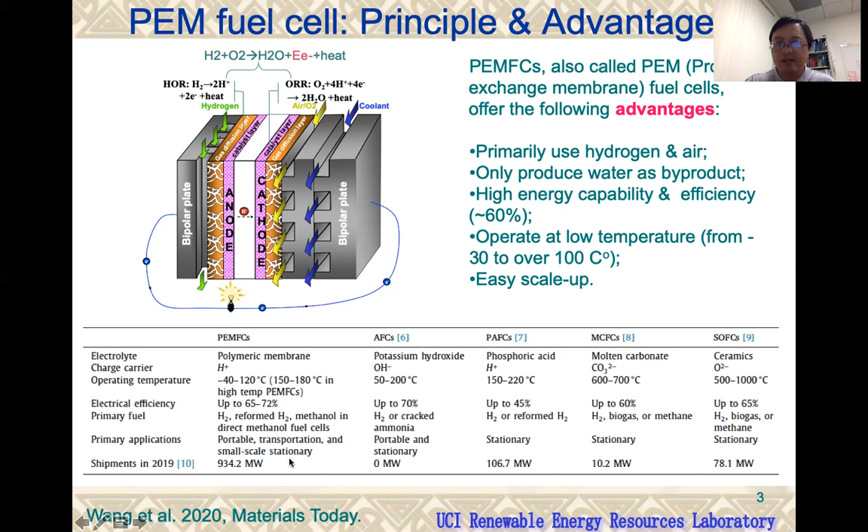In 2019, the data shows that PEM fuel cells are the major fuel cell type which receives the most R&D efforts.

Putting them together, we get a fuel cell stack. A number of fuel cells are put together, and this stack needs, for example, a boost converter and a hydrogen circulating pump to make a fuel cell engine. Then we put the engine in a car or bus to power the vehicle.

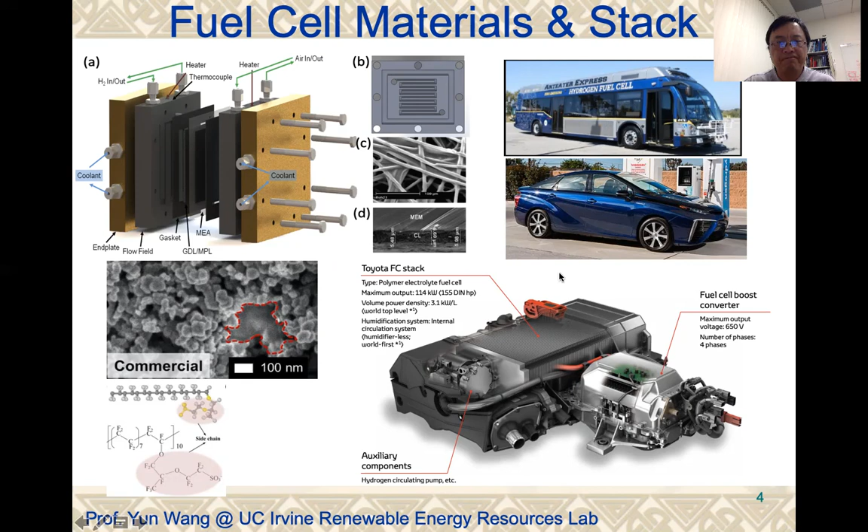In the past few years, you will see a number of fuel cell vehicles, for example, Toyota Mirai, Hyundai, and Honda, and also a few fuel cell buses operating on the road.

By 2019, there were 8,000, 5,000, and 3,000 fuel cell vehicles in the US, South Korea, and Japan respectively, and 2,000 in Europe. By 2030, there are goal targets of 5.3 million, and nearly a million for South Korea and Japan, 4.2 million in Europe, and 1 million in China. So again, this is a fast-growing market for fuel cell applications.

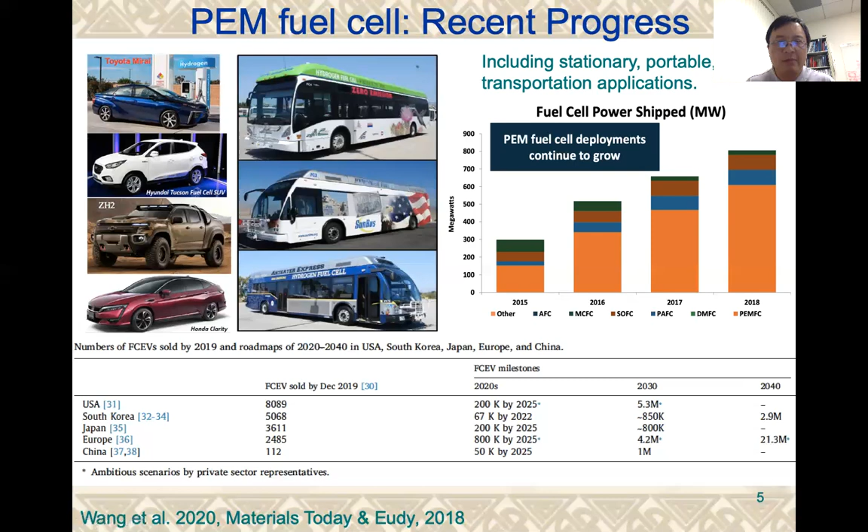On this side is the input to the vehicle: diesel plus air, and hydrogen plus air. The hydrogen fuel cell uses less than half as much air, and this is for one year of operation, comparable in terms of operation hours and distance.

For the output, you see carbon dioxide, carbon monoxide, NOx, and particulate matter for the diesel engine, while for hydrogen there is only water and some unused oxygen and nitrogen. So you see from the comparison the clean power and zero emission technology enabled by PEM fuel cell technology.

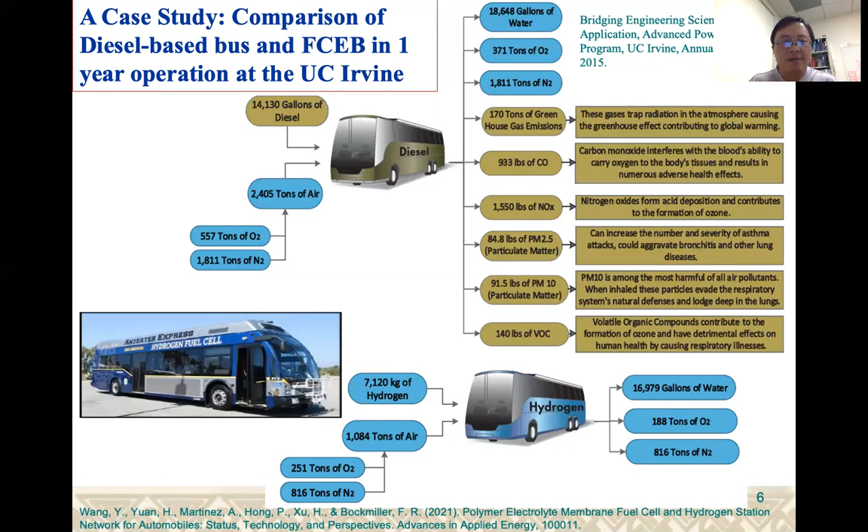Another barrier to fuel cell vehicle application is hydrogen refueling station availability. This shows a hydrogen gas station structure. Since this is gas refueling, it can take 3 to 5 minutes, comparable to traditional gasoline refueling, but much faster than a battery recharge station, which takes about 20 to 30 minutes.

In the United States, we have 44 stations, most of them in California. Germany has 85, Japan 133, South Korea 34, and China 52. By the 2030s there are goals for rapid growth: over 1,000 in the United States, about 1,000 in Japan, 500 in South Korea, and 1,000 in China.

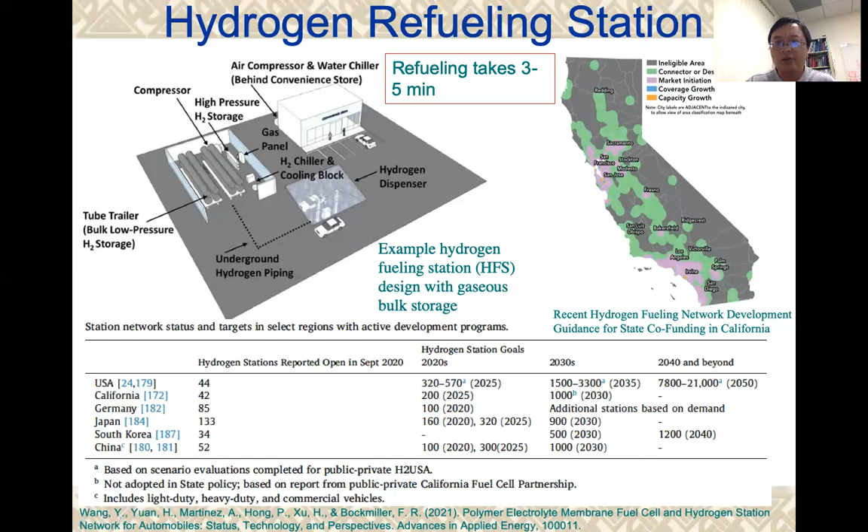This is an effort to develop the infrastructure for customers to use to refuel their fuel cell vehicles.

Now, machine learning and AI - I quote some words from our previous president, Donald Trump, about the importance of AI for the economic and national security of our country.

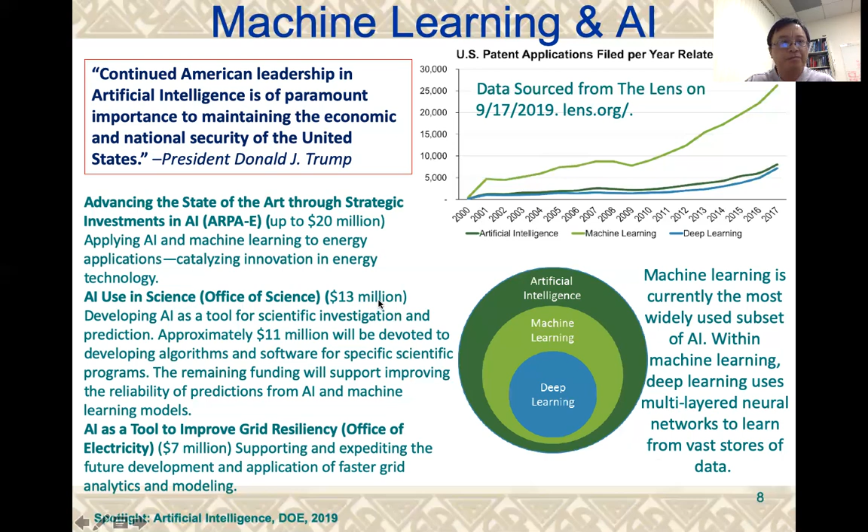On the fundamental side, we get data, and machine learning and AI can improve fuel cell performance, materials, and imaging analysis. On the application side, operating data can be put into machine learning for learning, and machine learning and AI can provide fuel cell control, hybrid design, and optimization.

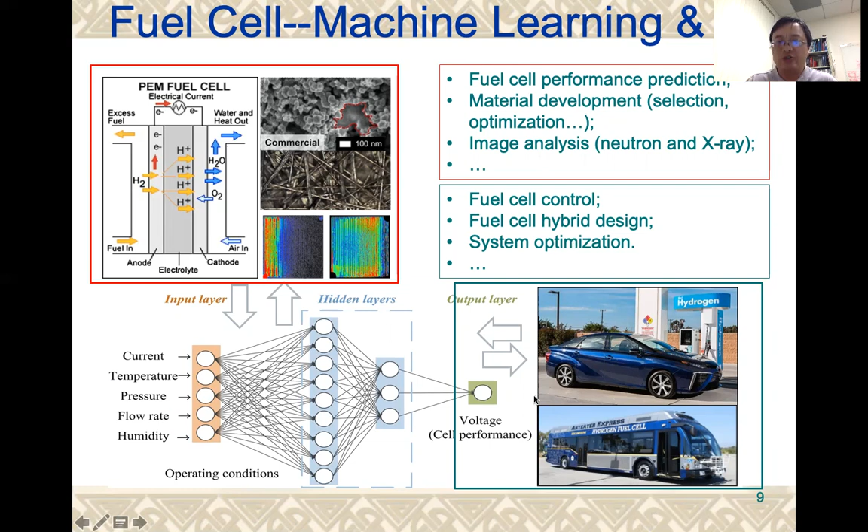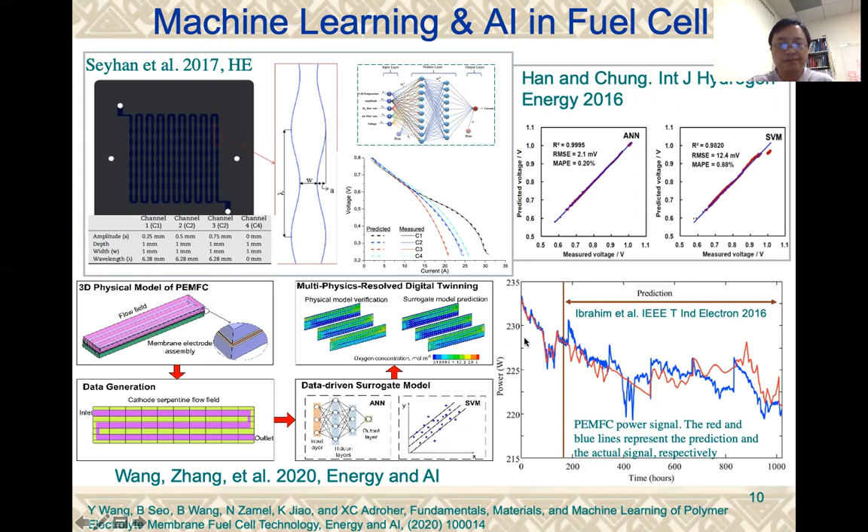In our review paper, we summarize recent work on machine learning and AI in fuel cells, showing ANN, SVM, and other methods. This table, along with more tables in the paper, shows the targets and details of the machine learning methods and the references.

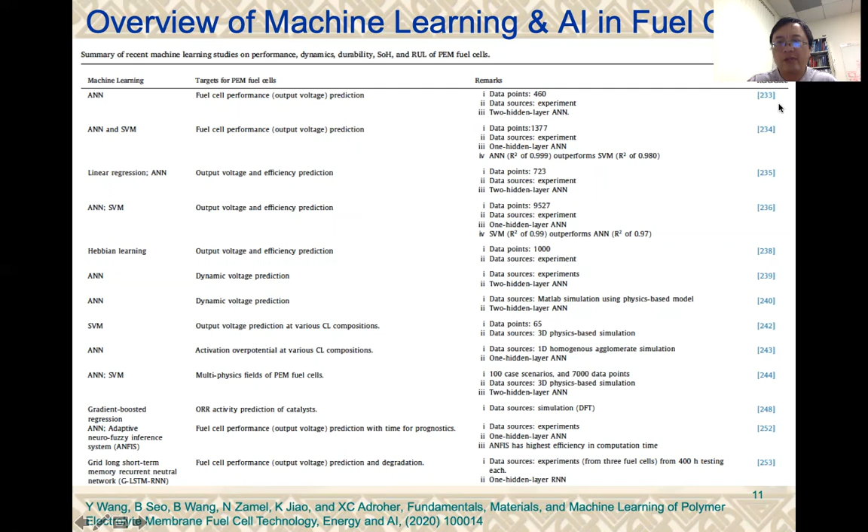We also summarize the machine learning and AI methods used for fuel cell R&D. From the table you see neural networks, long short-term memory methods, and particle filtering methods, along with characteristics of recent work using these methods in fuel cell studies.

Now, in the following, I would like to use a few case studies active in my lab to investigate fuel cell fundamentals and their application. The first one is to study the two-phase flow in fuel cells.

In fuel cells, water is produced on the cathode side by the oxygen reduction reaction. If there's too much water, you get flooding in the fuel cell, and oxygen won't be able to reach the catalyst layer, so the fuel cell won't work very well.

Optical imaging shows the liquid water in the fuel cell channel from the gas diffusion layer or the catalyst layer. This shows the water content in a fuel cell by neutron imaging and 3D modeling, showing liquid water produced and flowing from the gas diffusion layer, removed by the channel flow. This is the liquid water under the land versus under the channel under different current density operation.

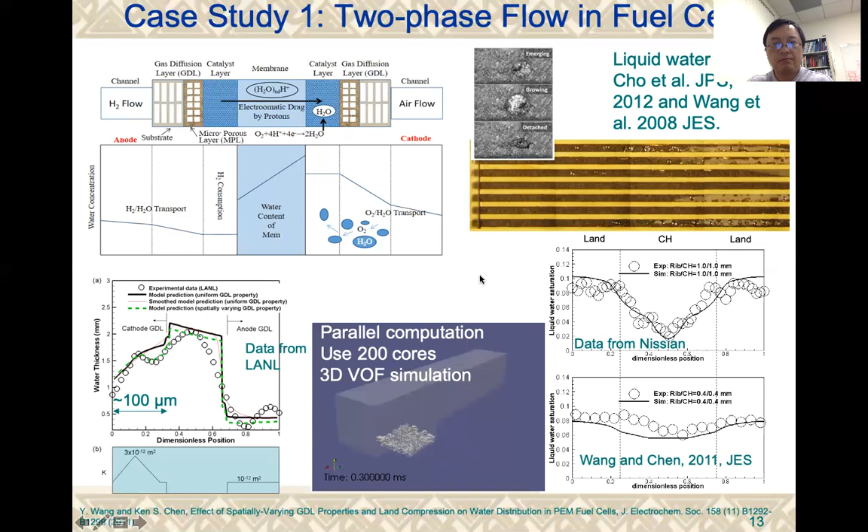Neutron imaging is a very effective method to visualize liquid water in the PEM fuel cell, because thermal neutrons are very sensitive to liquid water versus other fuel cell materials, such as aluminum or carbon. Again, this shows the neutron beam on an operating fuel cell, and we get the liquid water.

Now, the second case study is to predict fuel cell performance. Fuel cell performance is governed by a few mechanisms such as crossover, activation loss, and ohmic loss, which is a linear drop.

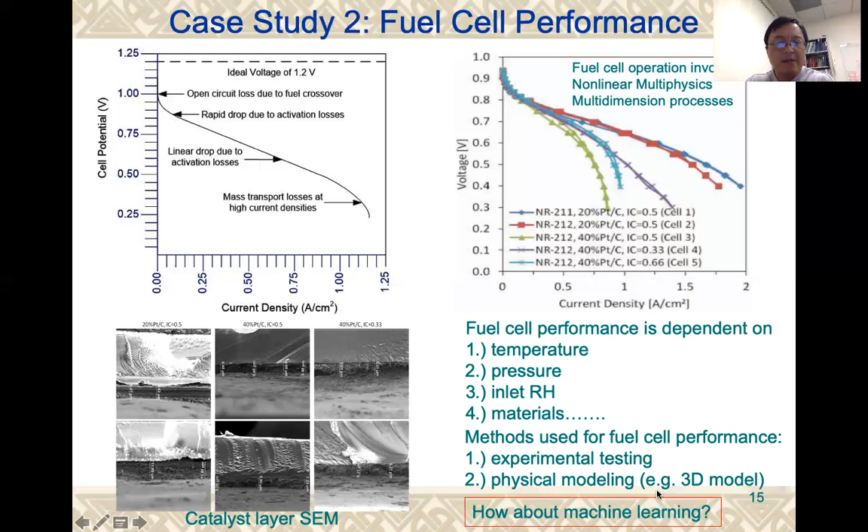We like to see a higher voltage under a specific current. Fuel cell performance is governed by a few parameters, and we normally use experiment, measurement, or physical modeling to get the fuel cell performance, which is normally time consuming. We want to see how machine learning or AI methods can help with fuel cell performance prediction.

In this fuel cell machine learning model, we use a neural network. For the input layer, we use parameters and data from a 3D model, over 1,000 data points. For the learning, I use the BP algorithm plus a transfer function, and we predict the voltage.

This shows different types of conditions, and this is the convergence of iteration in machine learning. This comparison with the testing data shows very good agreement.

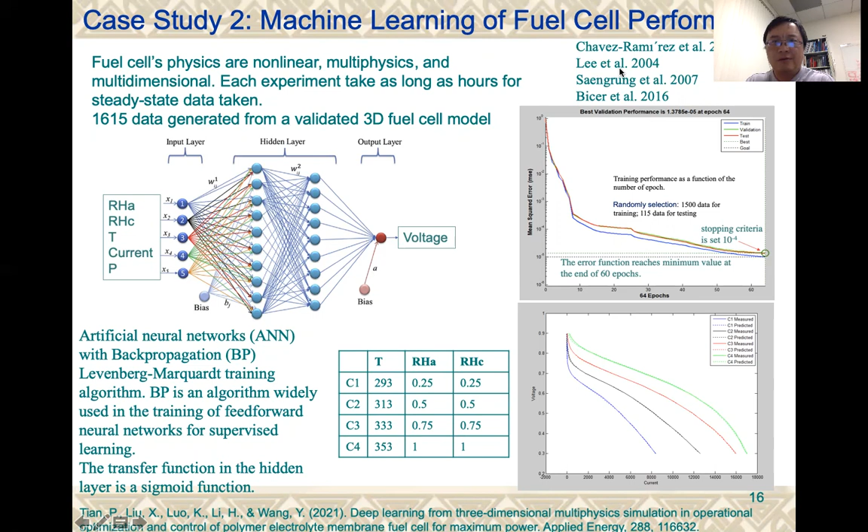In addition to our work, there are other people working in the same area, including some colleagues back in 2004.

With the fuel cell performance learning, we can further couple it with a genetic algorithm to predict the maximum power or the maximum power condition.

Again, this is the genetic algorithm, which is a biological evolution optimization method — you see crossover and mutation — where we couple it with the ANN. The ANN learns from the multi-physics model, and then this GA structure optimizes the set of parameters for maximum power output.

This shows the comparison with input data, where you see the fuel cell can achieve a maximum of about 0.8 watts per centimeter squared power.

We also apply this method to identify the maximum achievable power under different temperatures, which is very important for practical application, as you see in the red curve. So, the highest temperature does not give us the highest peak power, because of water management. The best temperature for maximum power is around 360 Kelvin.

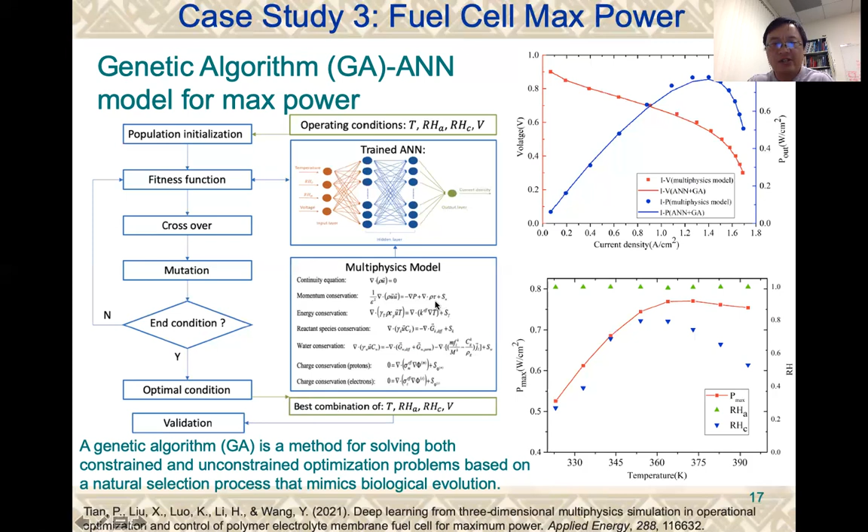And we also apply machine learning and the GA to optimize a material of the fuel cell, which is a porous media flow field. In a porous media flow field, we put a porous media in the channel, which provides some advantages, for example, better electron conductivity and also heat transfer and heat removal. These materials can be such as metal foam and carbon paper.

And this is the Toyota Mirai, a recently commercialized fuel cell vehicle, which adopts the porous media flow field on the cathode side. One part here is the porous media permeability versus porosity, which is important to manage the pumping power of a fuel cell. And again, the porous media flow field shows improvement in fuel cell high current density performance because of the improved mass mixing and mass transfer characteristics.

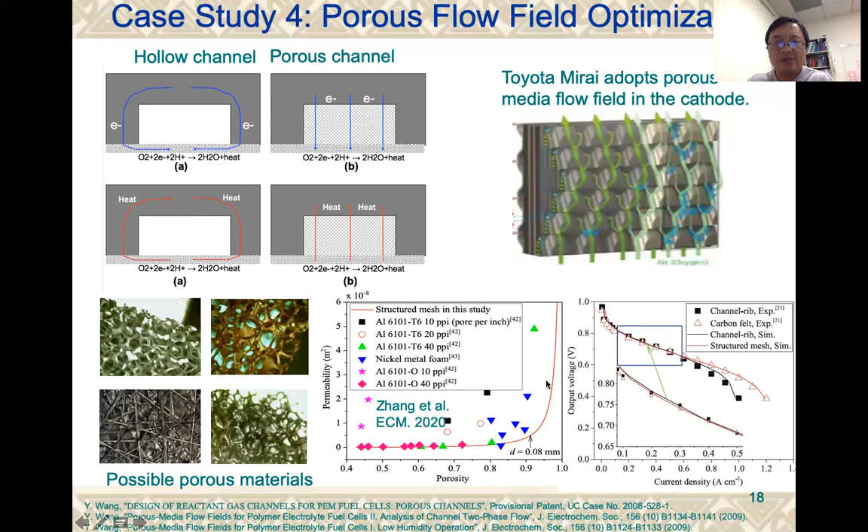And this shows our study. We use a digitally constructed porous media structure, we call it the structured mesh, in a fuel cell model. You see here the space between the mesh and the diameter of the rod. Again, this simulation is coupled with electrochemical reaction. The lines here show the reactant flow, and with this rod, mass mixing in the channel increases.

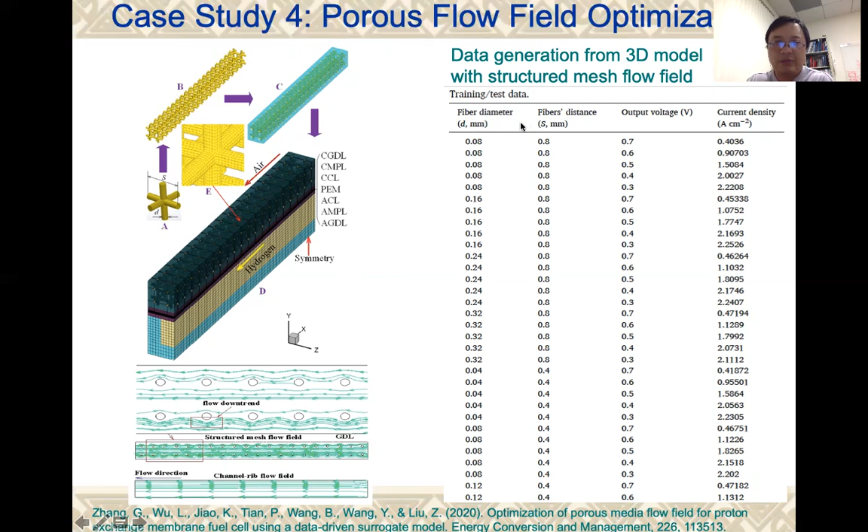So we use different fiber diameters, distances and parameters, and we get the data from the model. Then we put this table into machine learning shown here. We use the support vector machine to learn those data, coupled with the genetic algorithm for parameter optimization to get the maximum power current density.

So this shows the prediction for the GA and SVM, and we can also get the ohmic resistance under different porosity and fiber spacing. This shows the porosity and current density, and the results and methods are summarized in our recent paper in Energy Conversion and Management.

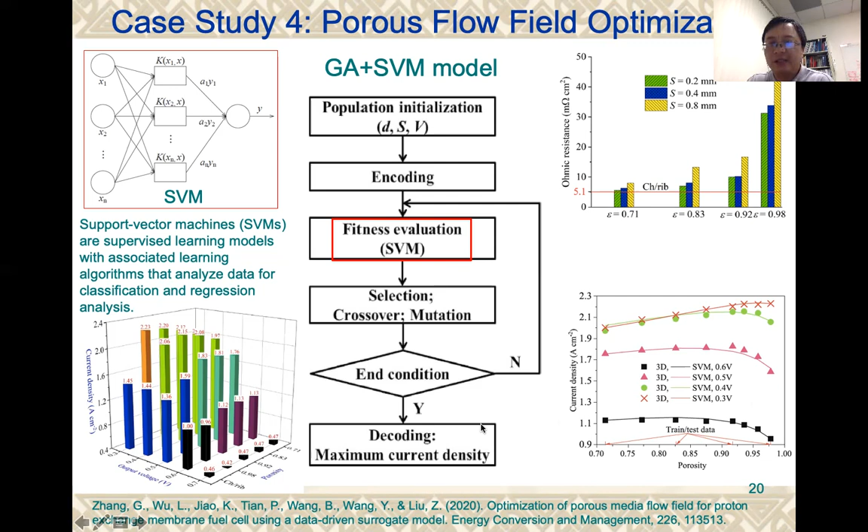For opportunities, we put these parts, the fuel cell performance, material optimization and control, over here. We believe that fuel cell physics needs to be incorporated in machine learning and AI. We summarize a few major fuel cell components. There are major physics, such as ion transport with the Nernst-Planck equation, two-phase flow, and also Ohm's law. Those need to be incorporated in machine learning or AI in order to better predict fuel cell performance and develop materials. There's a target material for each component. The equations are not given here, but they're in our recent review paper.

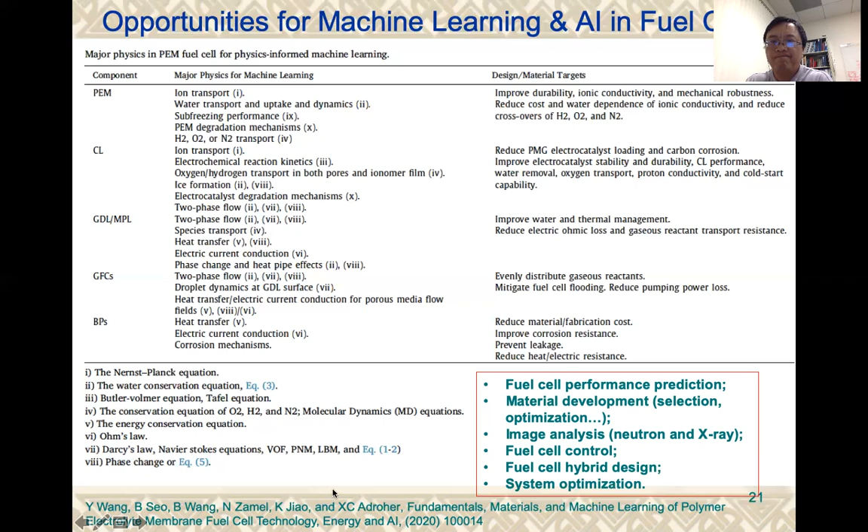We also summarize the professional machine learning tools available for R&D for energy and materials, following Butler's paper in Nature. You will see the link and the description of the packages. We think those materials are important for fuel cell R&D.

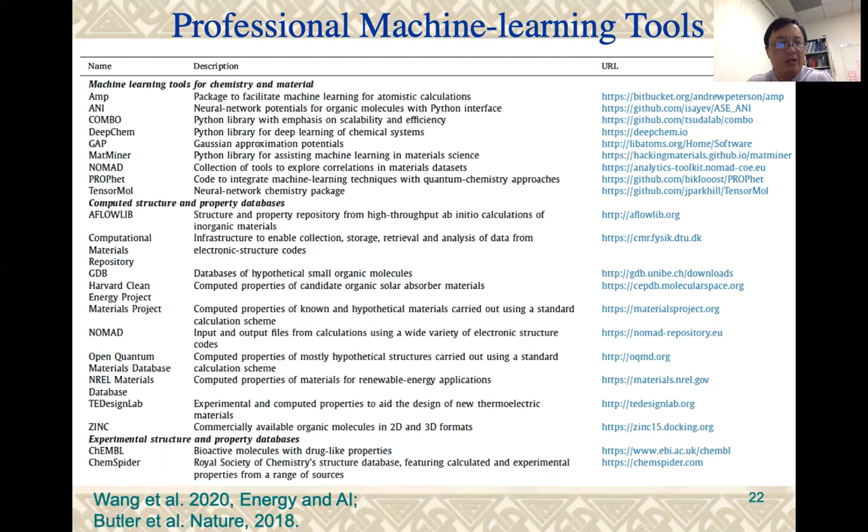In conclusion, PEM fuel cells are a promising future power source for portable, automobile and stationary applications. Fuel cell vehicles have been successfully commercialized, and cost, durability, and hydrogen infrastructure are the main barriers to broad fuel cell vehicle deployment. Machine learning and AI are powerful tools in fuel cell R&D, and various AI resources were summarized. CNN, ANN, and GA models can be applied to analyze in situ imaging, fuel cell performance, and optimization of fuel cell materials and control. Opportunities exist for machine learning and AI in fuel cell R&D, such as physics-informed learning, material design, and control optimization.